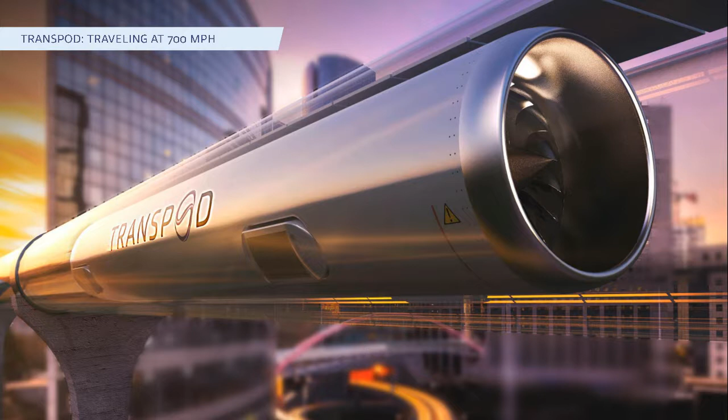So TransPod vehicles, you see one here, are being designed for travel at over 1,000 kilometers per hour under magnetic levitation and propulsion, similar to certain types of maglev systems, but with key new innovations, but propelled within low-pressure tubes to reduce air resistance and carry passengers between stations at over 1,000 kilometers per hour.

If you really look at the history of tube transportation, it was first proposed about 100 years ago and gradually developed over the years, and even you could say popularized a few years ago. But now it's time for key new innovations. That's where the TransPod system comes into play, where we have new technologies partly related to aerospace, partly related to rail and infrastructure to make the system work more efficiently.

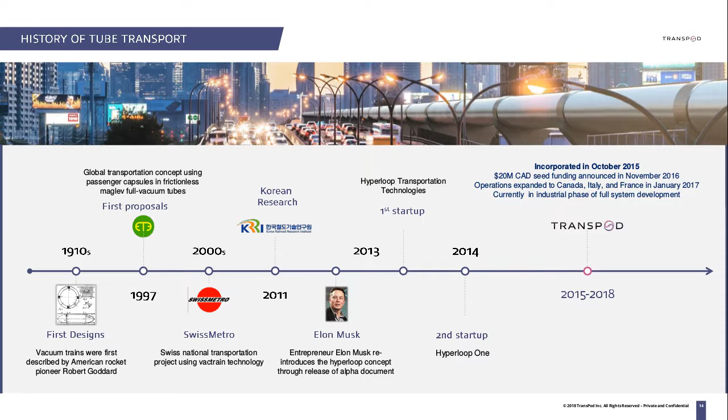And the TransPod vehicle and the TransPod infrastructure are really what work together in a matched pair to make the TransPod system as a whole work for passenger transportation as well as cargo transportation. And so obviously this is a major multi-year project with very extensive industrial work internationally, with multidisciplinary work across areas of civil engineering, physics, electrical engineering, aerospace, and so on.

And really you can trace back and ask, why are we doing this? Well, as a society, we're confronted with issues of traffic congestion with existing vehicles. We have key issues to deal with, but also climate change, where you have quite a bit of fossil fuels still in use, and quite a bit of that is for the transportation industry, because we have existing vehicles that are very fossil fuel dependent, including aircraft where they require a very energy dense fuel.

So we really look to the bigger picture and fundamentally new vehicle designs and infrastructure designs to carry those new vehicles. And in particular, looking at the low pressure of space and bringing that near vacuum down to Earth inside a contained infrastructure provided by vacuum pumping and supporting propulsion systems, and that's what the TransPod system becomes.

And in fact, when you see renderings like this, it's important to note that it's clear just in the rendering to help you see the vehicle inside, but the actual TransPod infrastructure is not clear. It's spiral welded steel construction with the supporting electrical, fire safety, vacuum pumping, and other supporting subsystems.

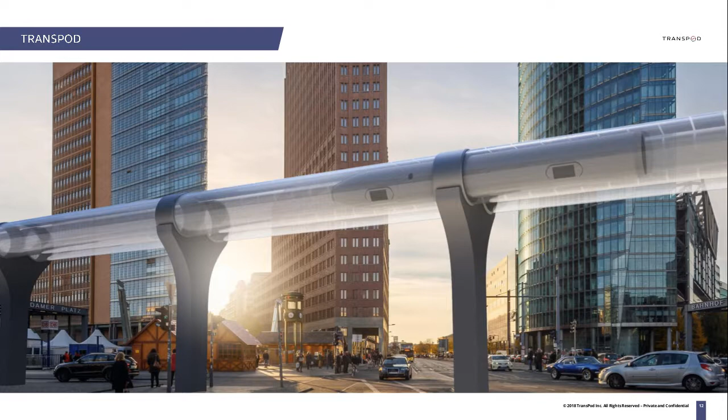So obviously it's a multi-year project, similar to an aircraft design program. And in fact, this TransPod vehicle might appear a bit similar to an aircraft fuselage without the wings. And at the front, you see what looks like a jet engine, but it's actually an electrically driven axial compressor to divert some of the airflow in the small amount of air pressure that still exists in the tube infrastructure, to reduce air resistance even further.

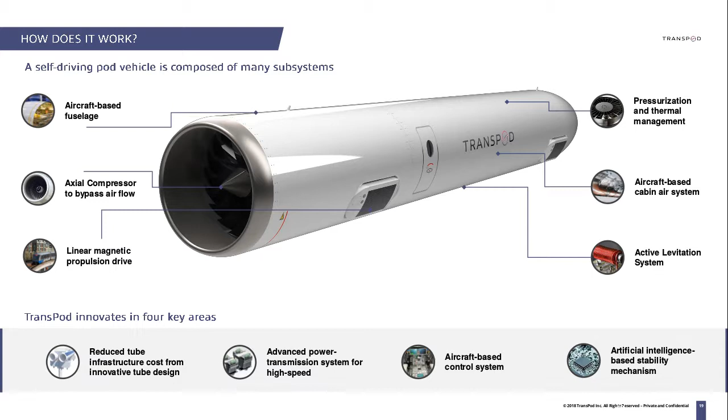And then also magnetic propulsion and levitation systems, thermal control systems, and so on, plus passenger seating. You see a bit of a door there, but this vehicle is a bit larger than it appears in this diagram. But rows of seating similar to on an aircraft, even though a lot of the supporting systems are more related to the space industry in the TransPod vehicle.

And so a twin tube construction to allow vehicle motion in both directions with multiple vehicles in the line, even in each direction at the same time, with appropriate separation distances and safety provisions similar to the rail industry. And the infrastructure is actually designed to be linked to the electrical grid for fully electric propulsion, where the power is carried over onto the vehicle through a third rail type of power transmission, so it's fossil fuel free propulsion.

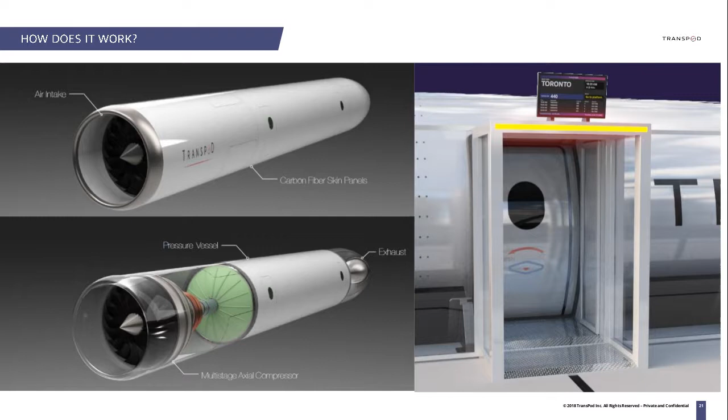So sustainability is a key factor, but even the mechanics of the docking procedures of the TransPod vehicles at stations is very critical, along with all of the fluid dynamics, aerodynamics, similar to high altitude flight systems, but inside the protected environment of a tube where you have aircraft-like flight and flight maneuvering, but protected from the elements, protected from

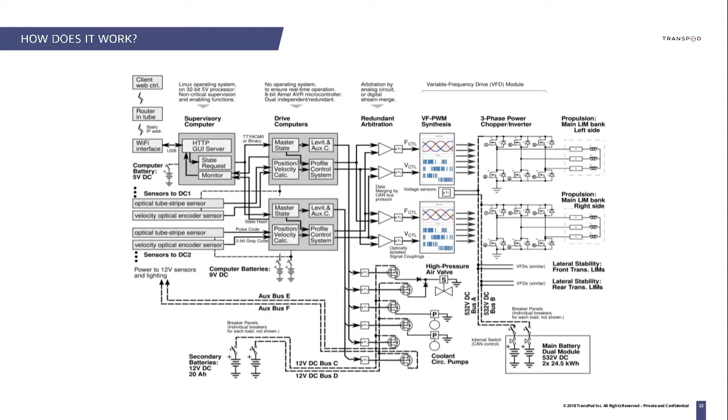turbulence, and so on. And so all of the supporting subsystems, electrical systems, safety systems, pressure management, and cabin air systems in the vehicle, but then of course the similar supporting systems, safety, fire safety, evacuation, similar to a metro line on the tube infrastructure.

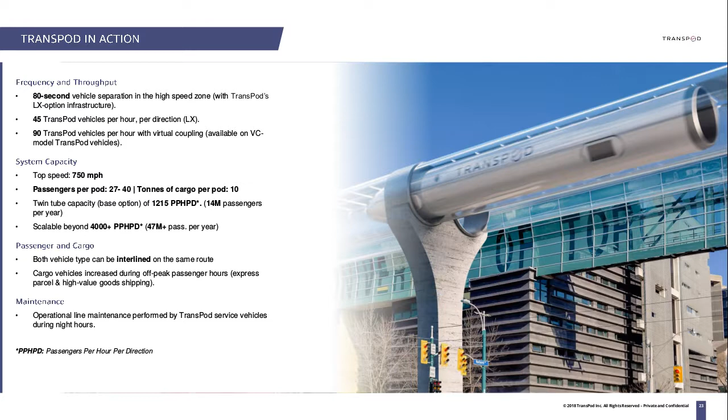Now when you have tube infrastructure such as this, it starts to become quite a bit like a rail system design. And so then you have provisions for rail types of passenger flow calculations for high frequency rail line and vehicle spacing and other rail-like safety and design issues. So it's again an interesting combination of spacecraft, aviation, and railway design.

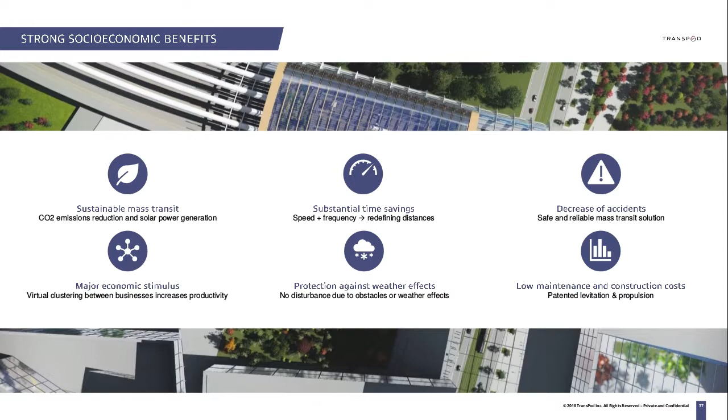But then the economic features that we are designing for, partly economic for the consumer, so ticket price, but also the speed and convenience. So it's fundamentally a different type of transportation than going to an airport where you have to book a ticket weeks in advance or days in advance for a specific time to show up at the airport. And even then, you're subject to the flight being delayed, canceled, or diverted, or being bumped from your seat.

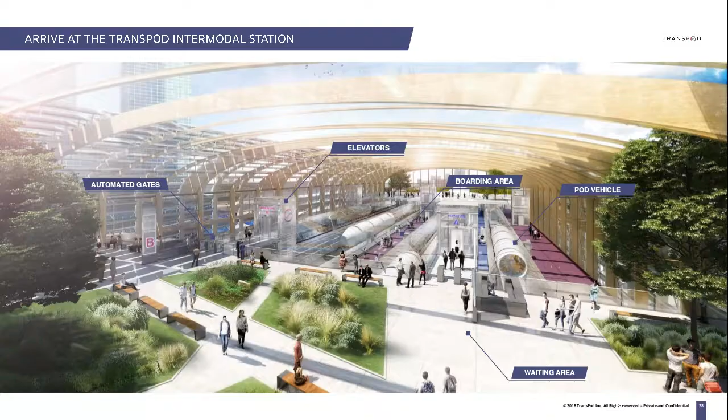But this is much more like a railway, high-frequency rail experience where you simply show up to a station and pay for your ticket. And so that type of passenger experience leads to the architectural designs. We're working with an architectural firm, but really it's integrated with all of the physics considerations for the infrastructure that support these low pressure environments where a vehicle goes through an airlock and enters into what becomes much more like a rail station.

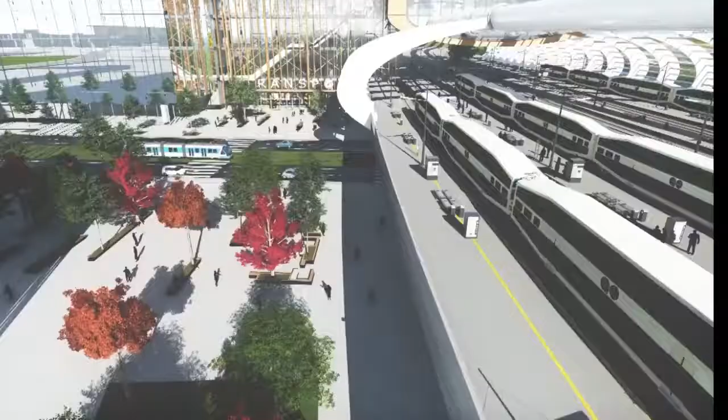And so we can see a little bit of a preview of one of the stations that we are working on. This is in collaboration with a French firm, but this is actually located in Toronto, which is a planned construction project, a very major project, which is a multimodal station where we're collaborating on the TransPod portion of that station to link up with additional modes like metro and regional rail.

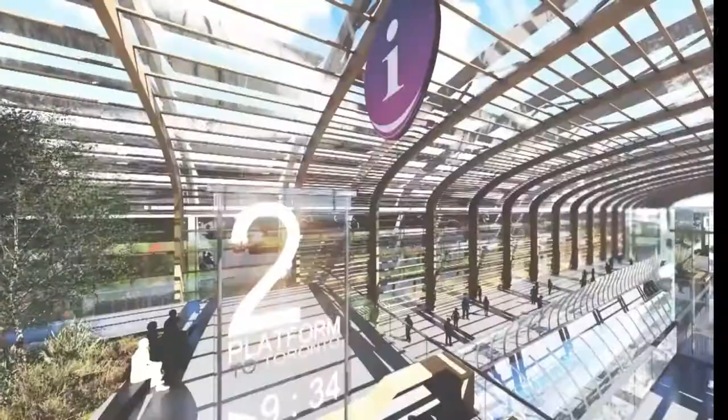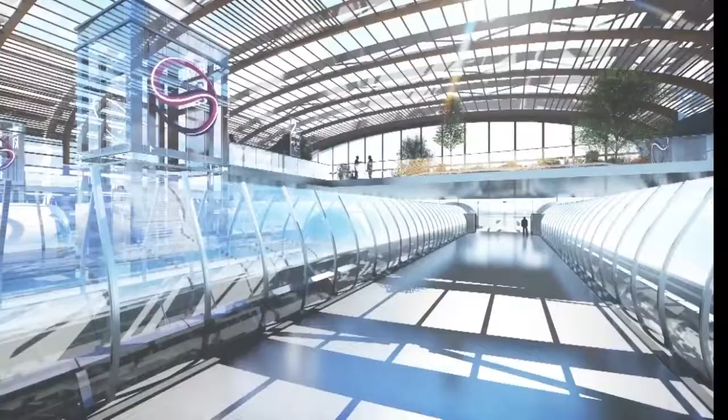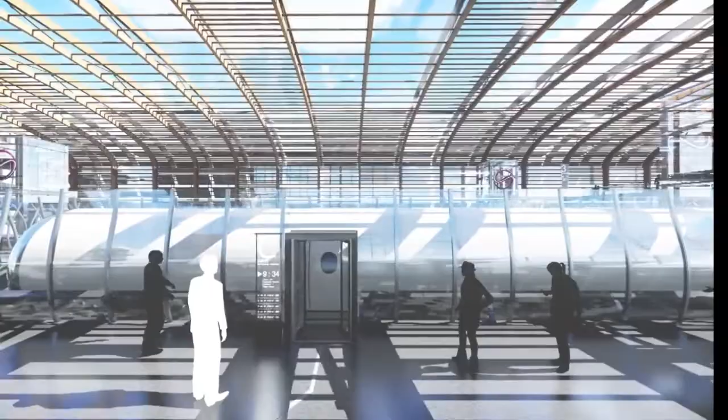of a design where passengers disembark on one side and board on the other side for the vehicle throughput to maximize efficiency and lower the delay time at the stations, and propelling under their own propulsion, electrically driven, into the airlock and into the high-speed zone of the tube.

And so that really means that there are quite a few design aspects that we are working on with major construction firms in different countries, consulting on the construction aspects as well as the aerospace design features. So it's very multidisciplinary, and then even human-centered design, so for example, seating inside, as well as cargo design.

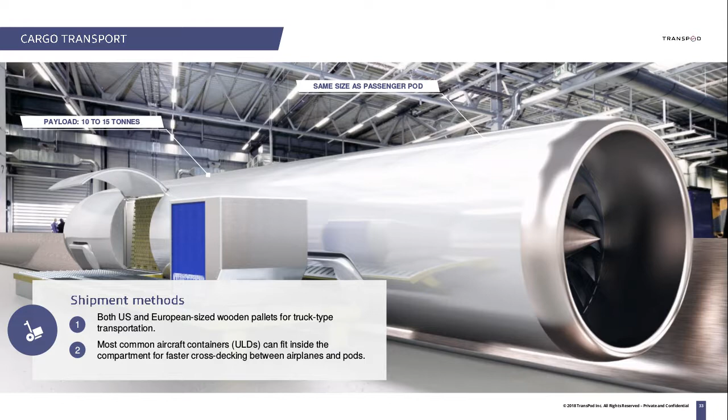Cargo vehicles which have the same propulsion systems but just a different interior, and so the markets for that are quite key when you have just-in-time deliveries and high value density goods that are time critical in today's economy.

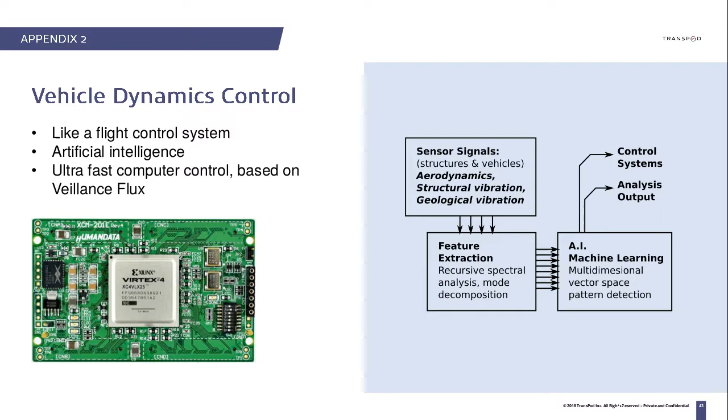But even the physics of quite a few innovations in the TransPod system that are partly with vehicle control, which is similar to a flight control system, but also intelligent sensing systems and innovations with propulsion, where you have to have very low latency real-time control because it's much too fast for any human driver. And so the right type of control and analysis of aerodynamics.

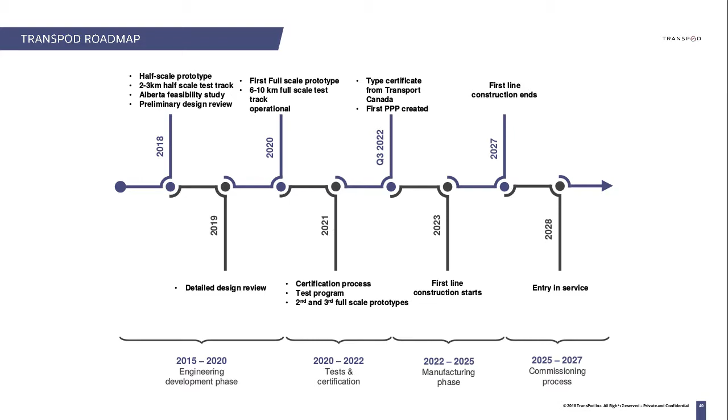So this is a very multi-year project where one of the key considerations is certification and safety and validation and verification, which comes partly from the rail industry as well as aerospace. And so that's why we are starting work already with European and Canadian regulatory agencies to establish regulatory frameworks for the TransPod system for long-term success as we work towards implementation and integrate all of the systems.

So it's a multi-year project with many industrial collaborators in Canada and Europe. So a pleasure working with all of them, and I would encourage you to read more if you're interested in the TransPod system and innovations that we are working on. So I hope that you have learned a little bit about that system, and I would be looking forward to collaborating with any of you in the future.